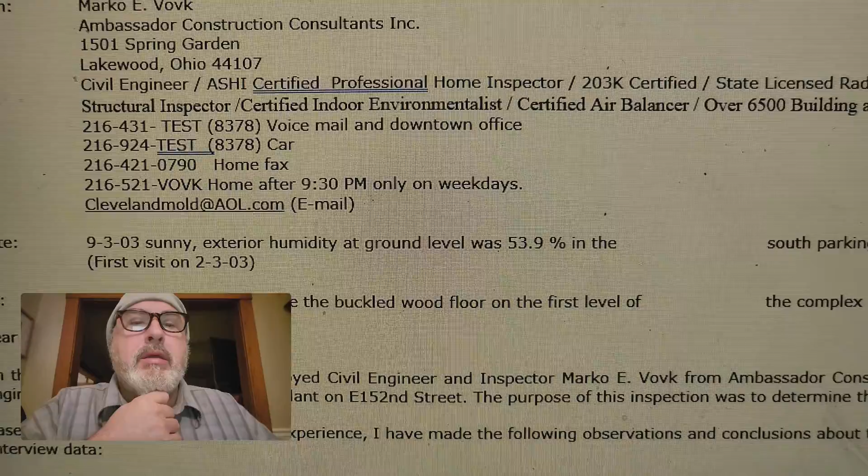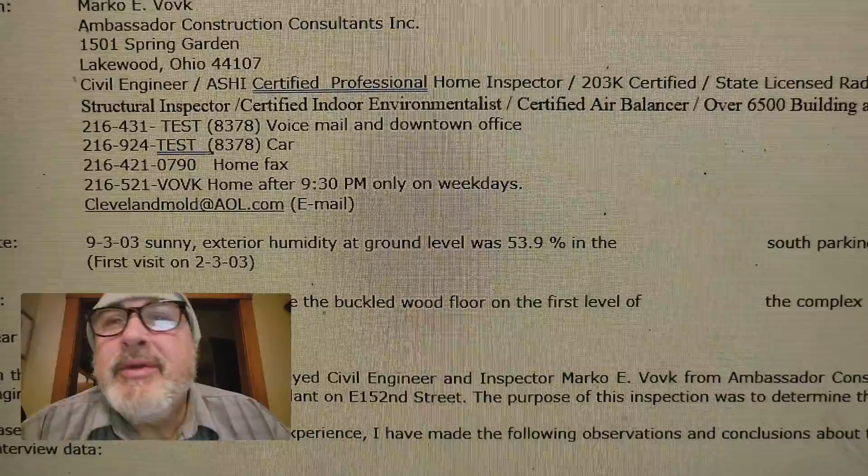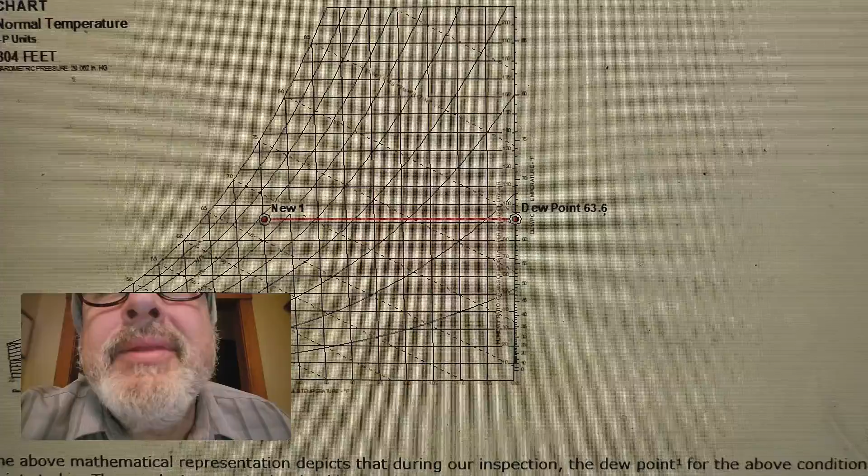So I'm going through my old files, and I used to do a lot of expert witness work. This was a case of water leaking in the basement, and we're trying to blame somebody for it, even though the basement was old, and the basement leaked.

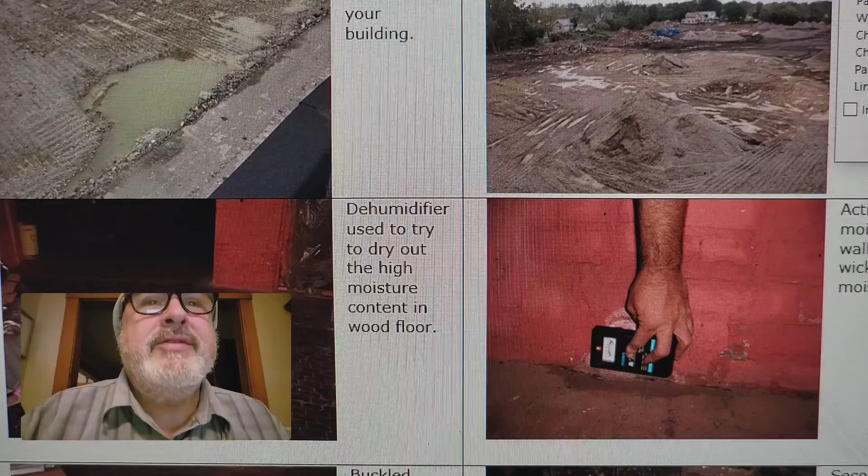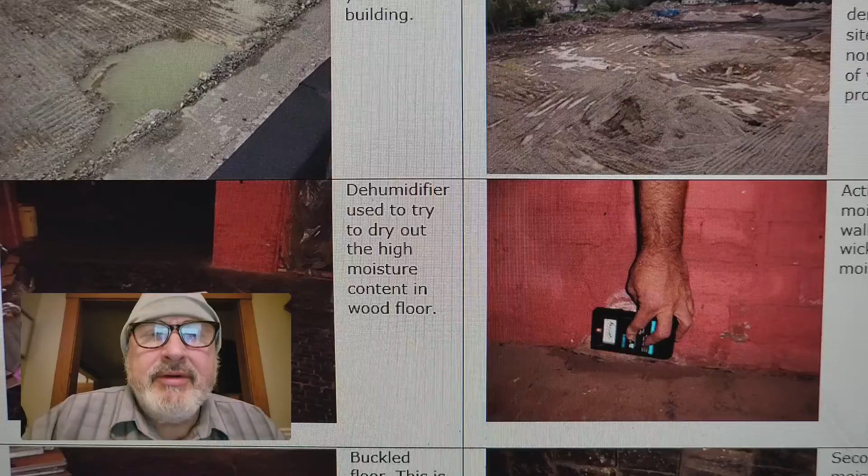Alright, let's talk about this. So you have an old foundation, the drain tile's old, it's slow, it's sluggish, and you might get some moisture. You run a dehumidifier, and then if it becomes a real serious issue, you implement damp proofing, waterproofing, or some type of water management.

So here is a house, and they cleared a home and a field next door to the house, which is at a higher elevation. Whenever you clear the land, remove buildings, sidewalks and pavements, and stop the controlled drainage, that watershed is going to be a lot of water. If you're at a lower foundation or lower elevation, it's going to run towards your house, and that's going to increase the water load of your basement that already leaks, and it's going to leak more. Pretty simple case here. So you want to maintain all the exterior water.

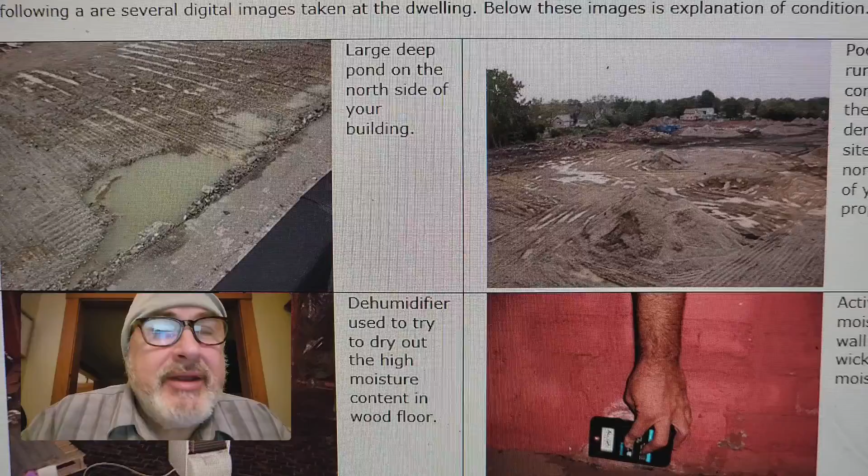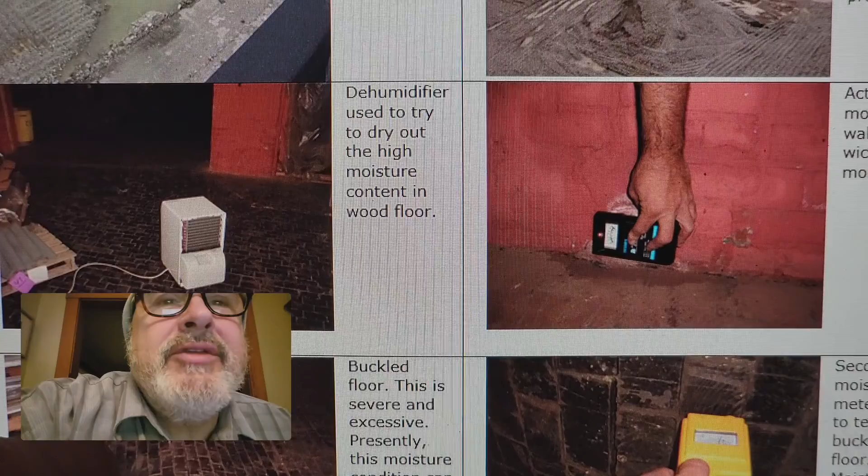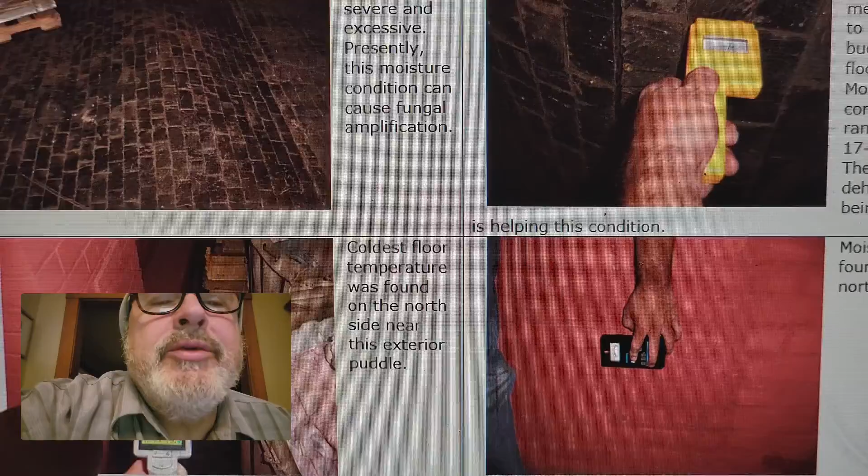So here you can see where they tore down the buildings, and they didn't control the water. They should have put some type of water baffles on the side of the property. They didn't. And then, of course, it's me using moisture meters and showing you how the basement leaks. It leaked more, and it was higher levels for longer periods of time. And then they did run a dehumidifier to help control the basement.

So if it's your own house and you want to minimize water leaks in your basement, without calling the waterproofer, keep your gutters clean. Check them out. You might have to snake your downspouts and your drain tile. Sprinkler heads - a lot of times people install sprinkler heads next to their foundations. What do you think is going to happen? You're going to water the ground.

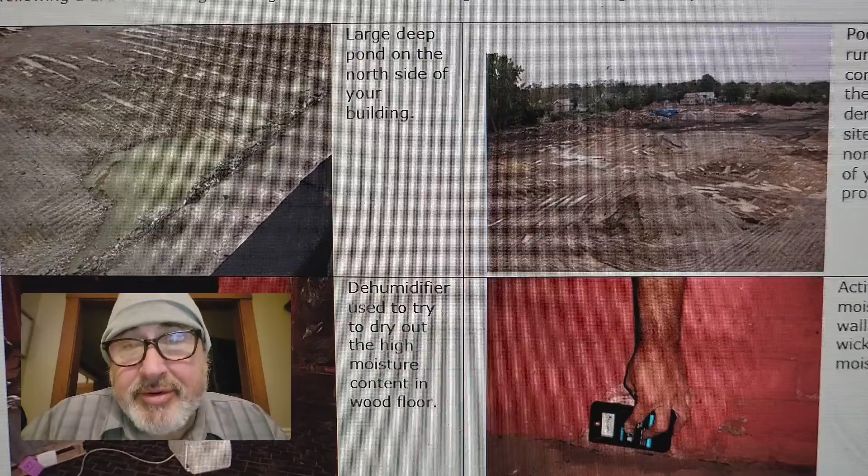If you have a drain tile system that's slow and sluggish, over years these drain tiles underground become silted. The more water you have with poor grading, water puddles, and that takes the fine silts down to your drain tile and plugs it up, causing them to be slow and sluggish and leak. That causes hydrostatic pressure, and before you know it, you have horizontal wall cracks.

So control the exterior moisture, and if you have an overload, it might not be your fault. This definitely wasn't our client's fault.

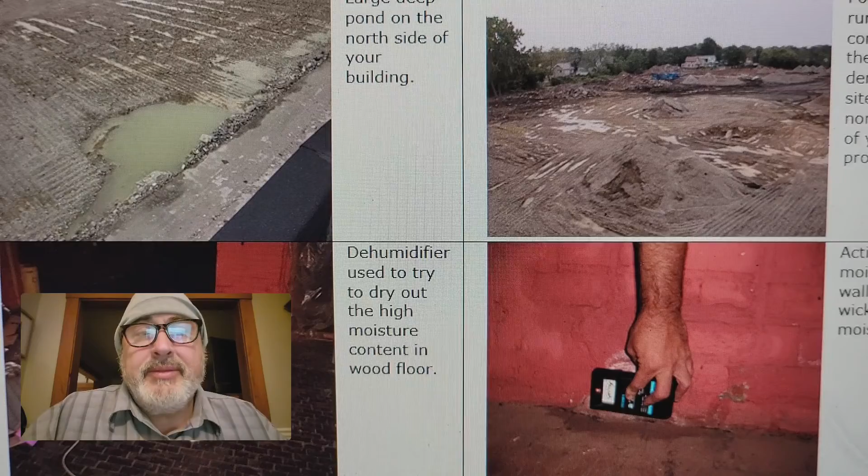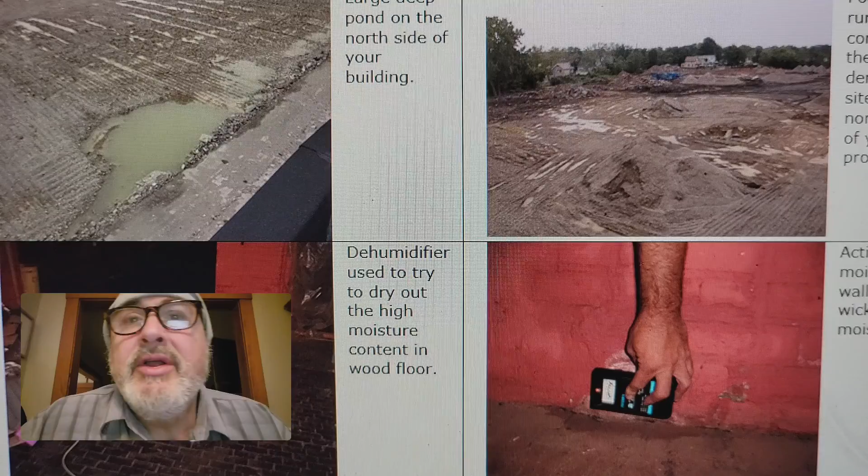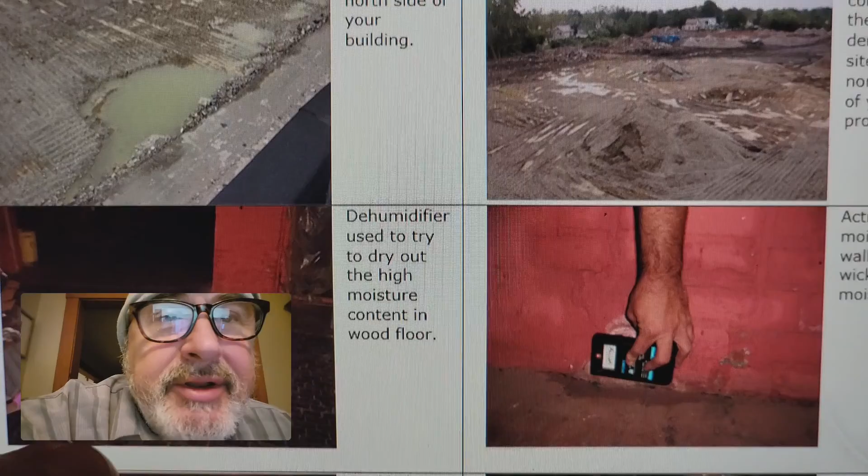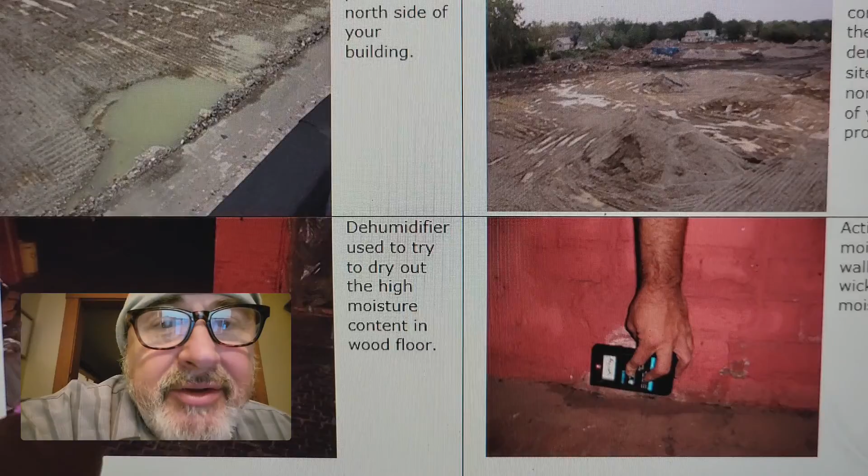So make sure your neighbors don't dump their water on your property, and don't be dumping your gutters on your neighbor's property either, because if their basement leaks, somebody like me is going to come out there, write a report, and you're not allowed to dump your water on somebody else's property. It's a code that you can't do that. You have to control the water from your property. And if you create a condition like this by cutting down trees or removing grass or removing parking lots or houses, the watershed is high, it increases, and anybody at a lower elevation that gets it, even the mud, if it causes their driveway, they get all muddy and stuff. It's kind of your fault. So control your water and don't let it dump on other people's property.